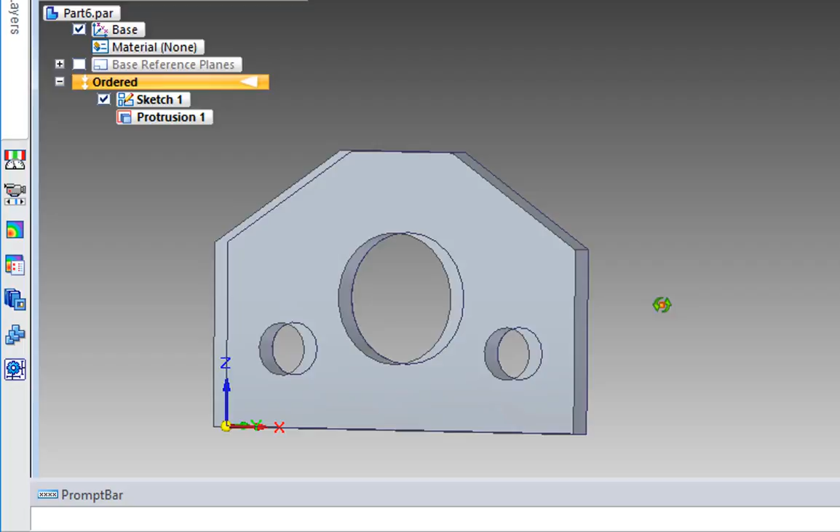Okay, so you finished problem 3. You made a nice plate. Now let's compare problem 3 and problem 4. I'll just kind of squish it over here and side by side them up on the screen.

There we go. And if we look at problem 4, we can clearly see it looks a lot like the problems we've solved so far. It looks like the plates we've been doing. It has a nice profile, and it has a hole in it.

A couple of new things. It has an angle here and an angle here. I'll show you how to measure angles with the Smart Dimension tool in this video. But the new thing going on here is this area in the middle where there's nothing.

It's a cut, as we'd call it. Some material has been cut and removed away. Because if we drew the front profile and extruded it all the way through this way, it would be a nice solid. But now we have a cut in there.

So what we're going to do is proceed as normal. We're going to draw the profile and this hole, and extrude the whole thing 1.5 — I think that's the depth of the part, along this edge. And all of these thicknesses, these walls around, are 0.25 thick. That's what these notes in the right-hand corner are telling us. So let's go ahead and get started and see what happens.

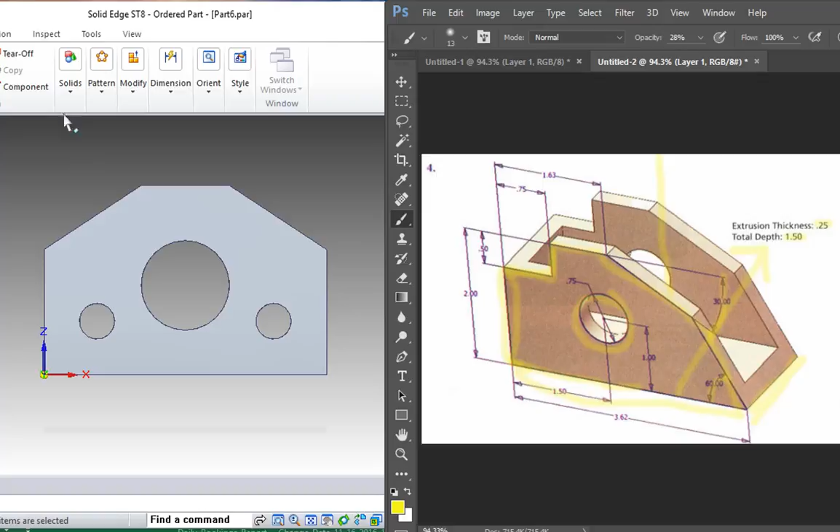To get started, we'll click on the Solid Edge logo. We'll click on New, then Inch Part, and click OK. Here we are, we have a new model started. We'll go up to the ribbon, click on Tools, then click on Ordered Drawing Mode. And there we go, we're ready to draw.

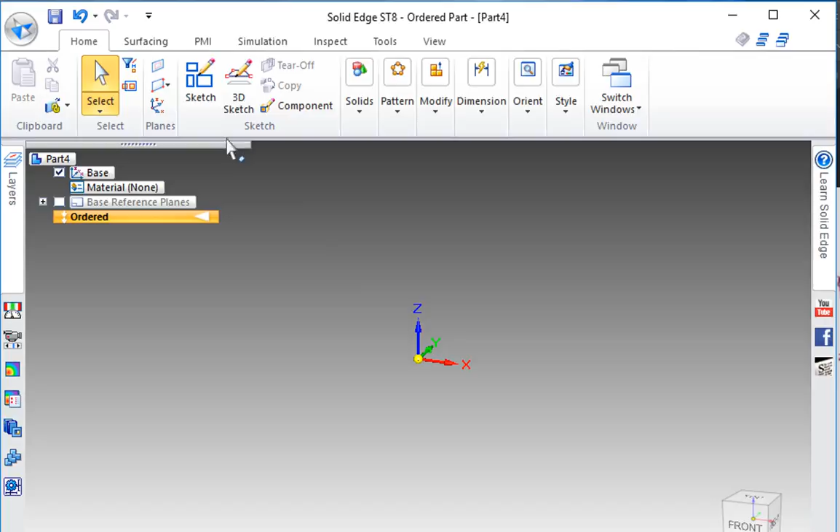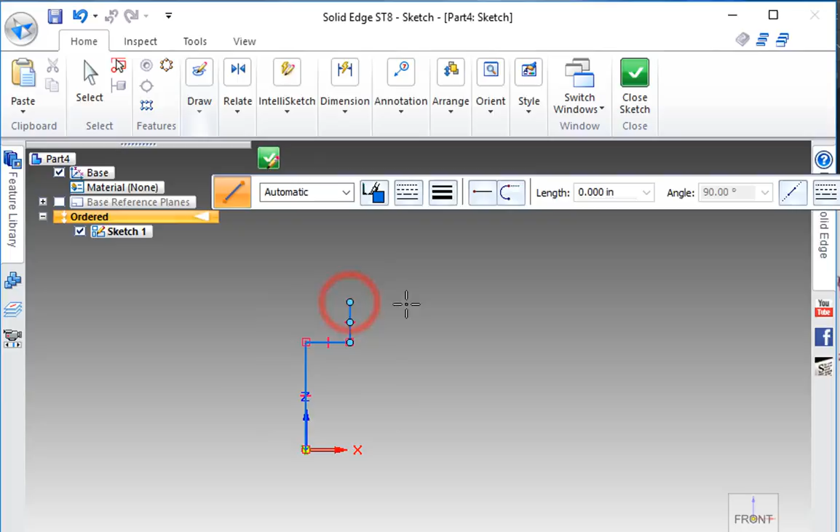I'm going to click Sketch, pick the front plane, and start drawing a different way this time. I'm just going to freehand the part with the line command. I'll click here, draw up — that looks like about 1.5 inches — over, up, over, down a lot. Maybe I'll line that up with that, and then pull that over there.

Now what I'm going to do after the fact is go dimension it. None of the dimensions are going to be accurate, so I'm going to try making this 3.62 and see what happens. That looks pretty good.

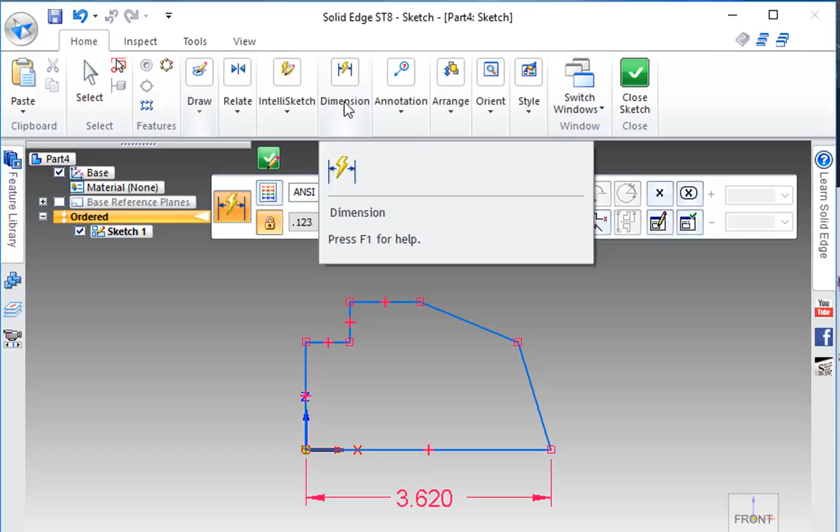I'm going to do an angle now. I'm going to pick this angle in the corner here, which is 60 degrees. I'll do Dimension, Smart Dimension, and click on this line and this line. Oops, let's try that again. Dimension, Smart Dimension, click on this line and this line.

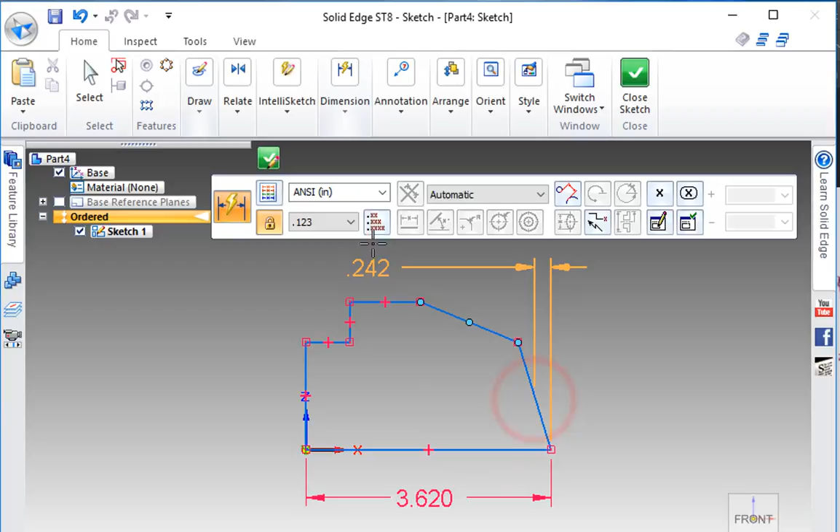Try that again. Dimension, click on this line and this line. And then I want to click on the angle dimension. I don't know why it was generating that error — that's kind of a strange thing. So make that 60.

I'll put this angle in on the top up here. There's also one specifically for angle between, so I can click on this line and that'll do just the angle. This is going to be, I think, 30 degrees from the print.

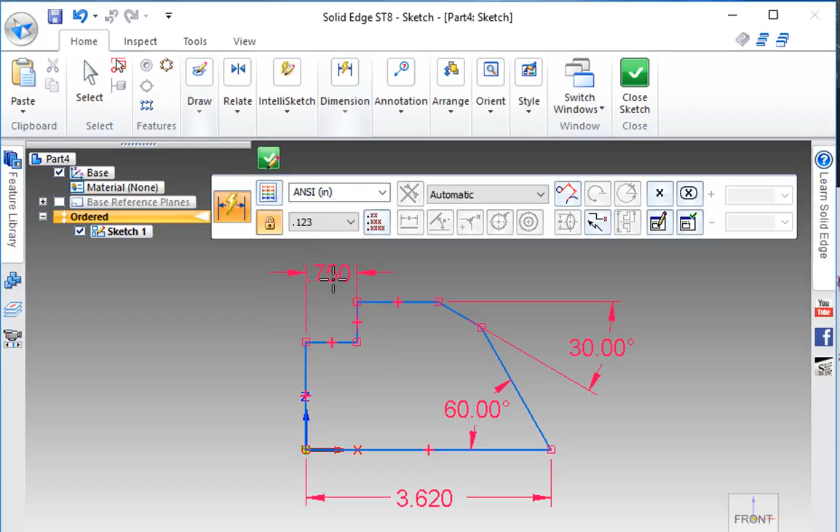Now I've got to put in the rest of the dimensions here. So dimension, this is going to be 0.75. Dimension top to bottom, it's going to be 2. And then dimension from this point to this point is going to be 1.63. So that looks like our part.

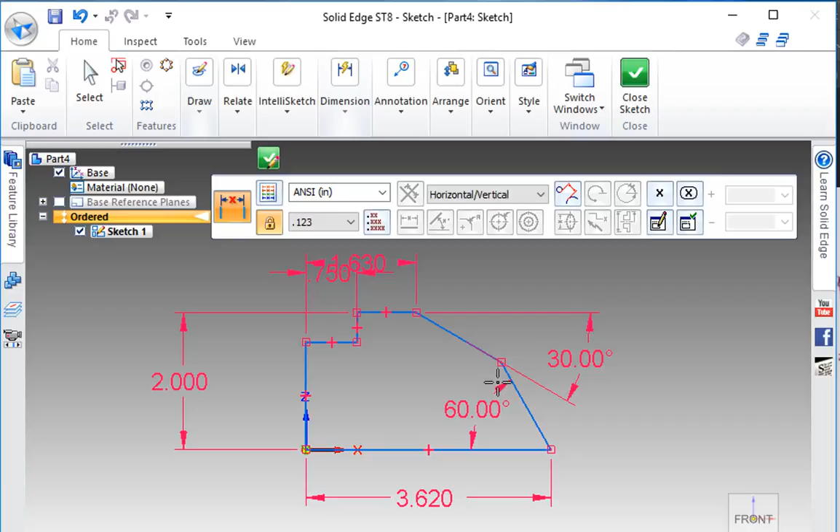And the thing of it is, I didn't put any dimensions in at the beginning. I just freehanded it, made it about the length of that, and put the dimensions in afterwards. So you can draw that way too. The reason I show you that is because you might want to invent something one day, and just want to get the shape out there without fussing over the dimensions right away.

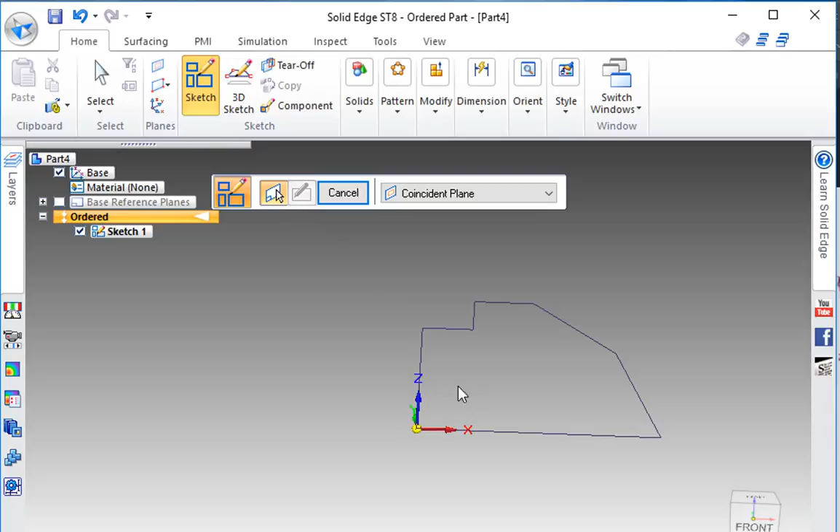So I accidentally closed the sketch, and I'm going to open it back up. I'll click Cancel, click on the sketch, click Edit Profile, and that will open up the sketch again. And I need to put the hole in there.

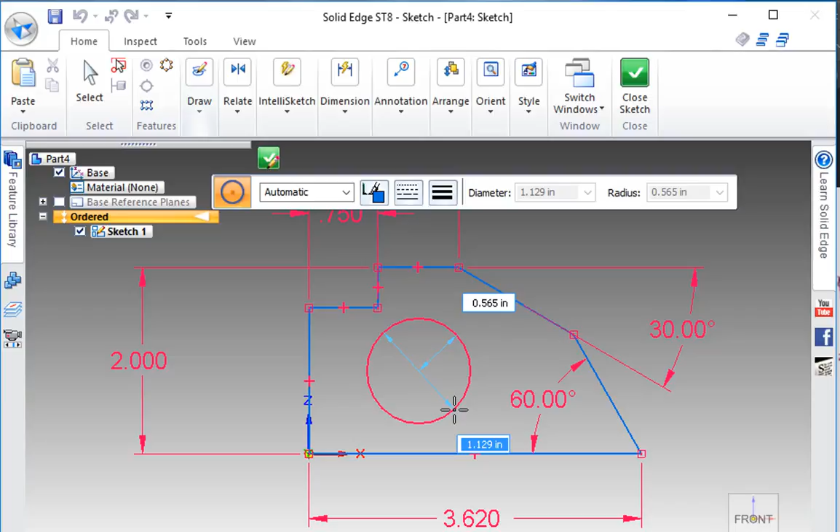So let's put the hole in. The hole is going to be a diameter of 0.75. Then I have to locate that hole — that's going to be from here to here. That dimension from the bottom is going to be 1, and then 1.5 from the left.

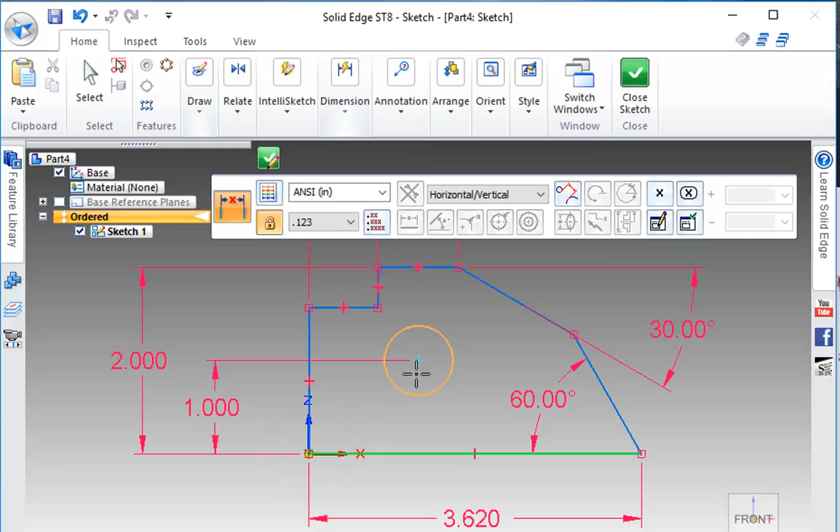So there is our part. Looks pretty good. Now let's go ahead and extrude it. I'm closing the sketch, clicking finish. I'm going to hit Control I for isometric view, and I'm going to hit solid extrude.

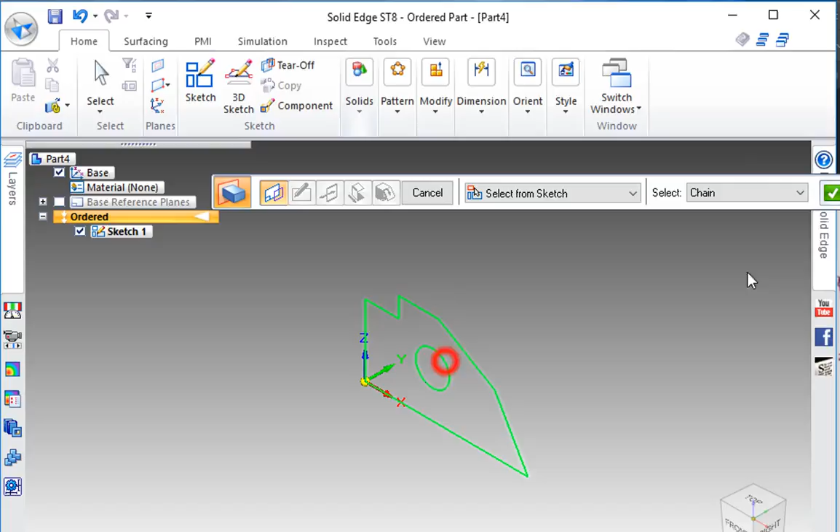And I'm going to pick the profile and extrude it out. So there you go. It's going to go 1.5, that'll be our distance, and I'll click. So there's our part right there.

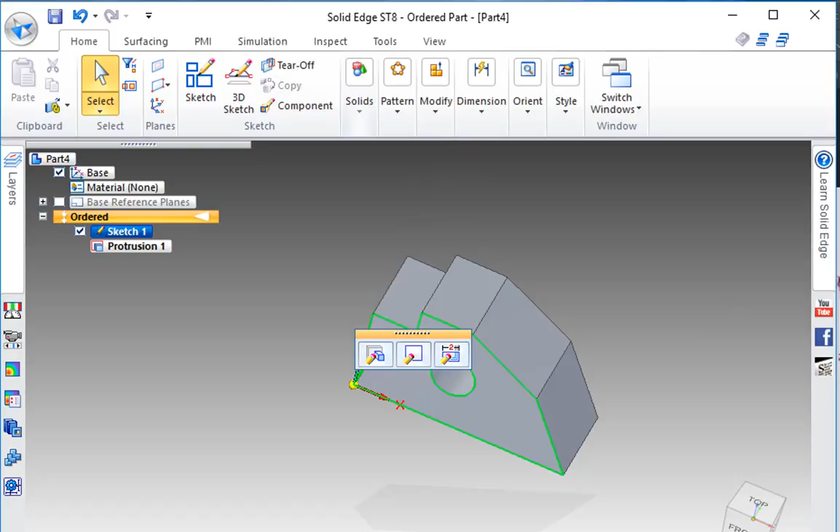But now I need to make the cut in the middle. So here's what I'm going to do next. I'm going to make a new sketch, and I'm going to put the sketch on the very top of the part. Watch, I'm going to hit sketch, and click this flat area right here.

So now I have a sketch plane. Let me go to isometric view here, and you can see it. I have a sketch plane on the top, very top of the part. See that? So I'm going to go back to the top view.

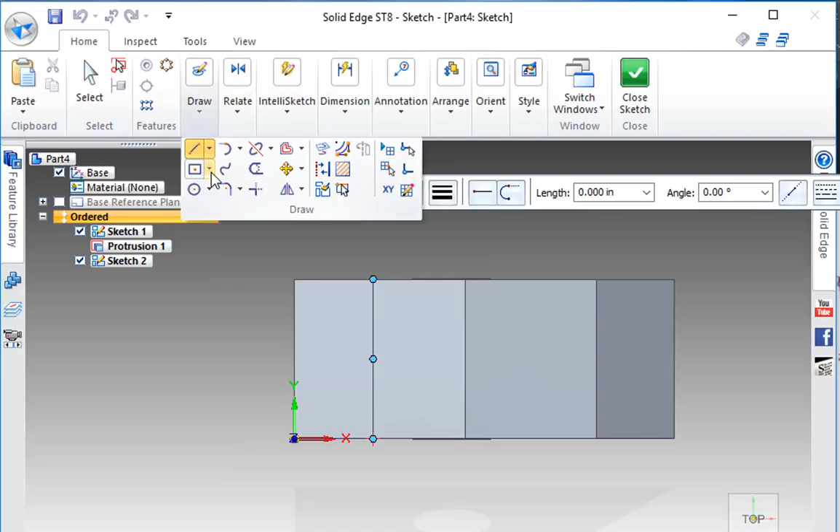And what I'm going to do is draw a rectangle. I want to do rectangle by 2 points. You'll notice if I click on the arrow, it gives me the option to pick rectangle by 2 points. And I'm going to click here,

here, there we go. Now I'm going to go dimension, smart dimension. I'm going to go between here and here. And we know the thickness all the way around is 0.25, so I'm just going to dimension this rectangle 0.25 from the edge all the way around.

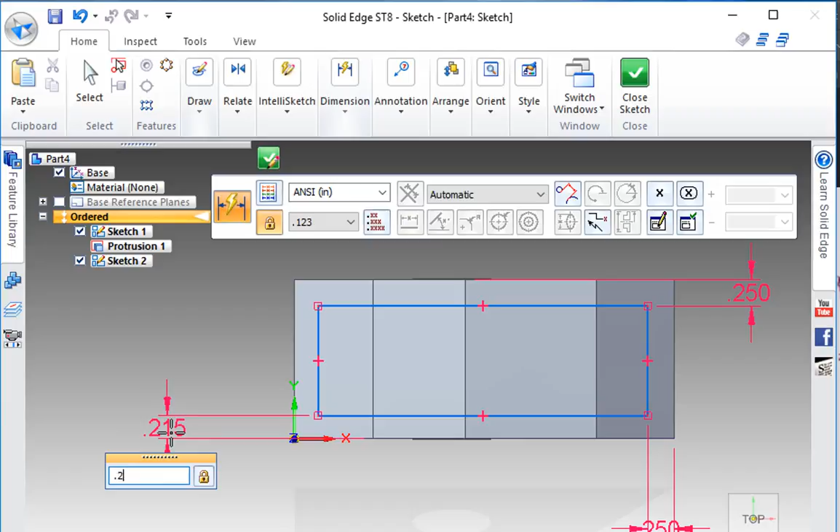And this is one of the nice things about Solid Edge: you don't have to project the underlying geometry. You can dimension right to the lines even though they're not part of the sketch. In other CAD packages, you have to project the geometry if you want to do something like this. But I don't know, I kind of like this. This is nice. So there we go.

0.25. So let's look at it in isometric view here just so you can see what it is. You can see that we have a rectangle in space on a plane right above the part. Now I'm going to hit close the sketch.

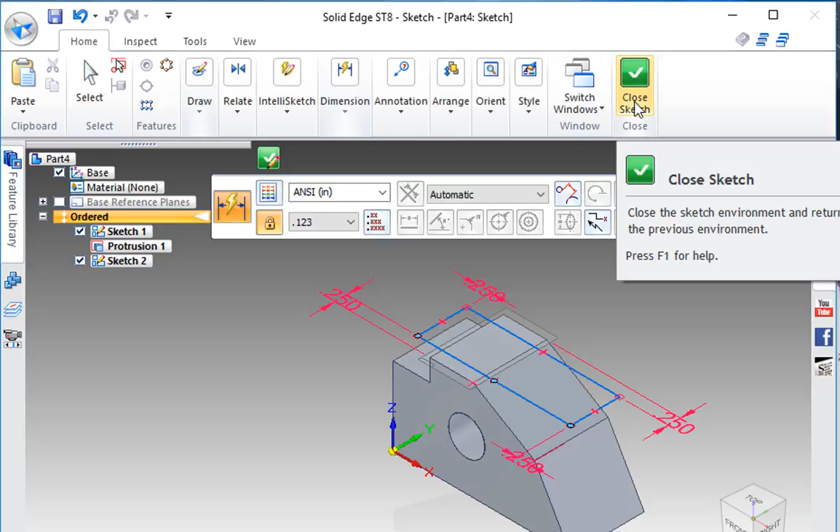So you can see my rectangle up there ready to go. And then what I'm going to do is cut this rectangle into the part. So I'm going to do solids, and next to extrude is a cut. What would you like to cut?

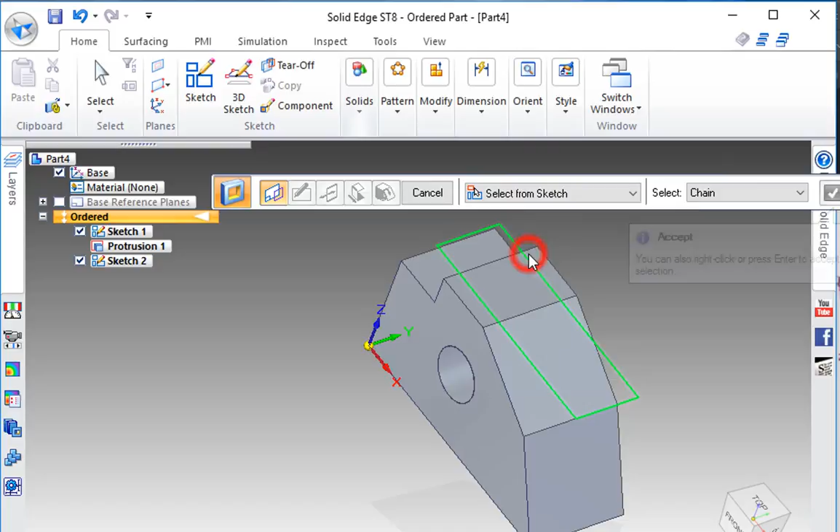I don't want to cut a coincident plane. I want to select from sketch. I want it to be this sketch right here. Click the green checkbox, and I'm going to pull it down. Look at that. Look at that.

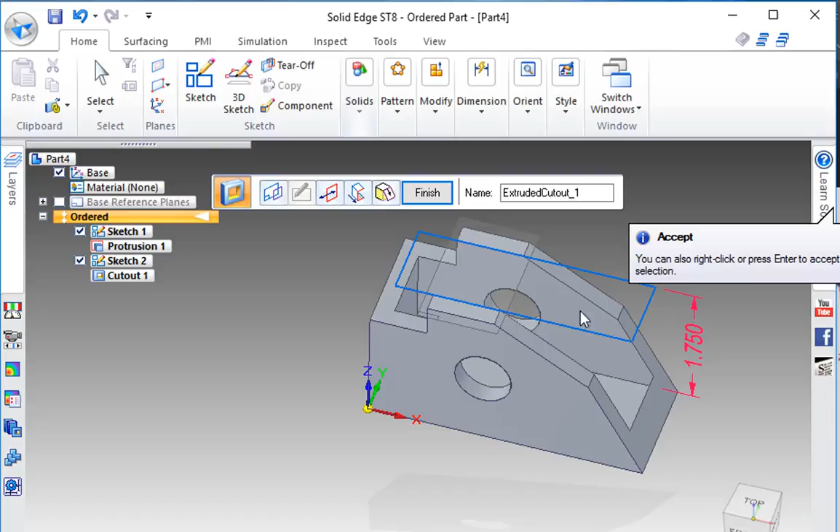So now the question is, how far do you pull it down? Anyway, I'll let you work that part out by looking at the print. There's a little math involved there. But overall, that's the concept of how to make that cut from the top there. So you make a new sketch, and you use that to cut down.

And also, anywhere you have a flat area, like I want to make another sketch on the front, no problem. I'm sketching on the front. I'm going to draw a circle. I could put a new circle there, close sketch, and then I could cut that circle through.

So if I were free designing something and I needed a hole for something, like maybe I'm working on a robot part, no problem. After the fact, I can always go through and cut more holes. And if you look at these little options here, I can click through all, and that will cut through - sorry, got to pick the arrow of the direction I want to go - that'll cut through all the material.

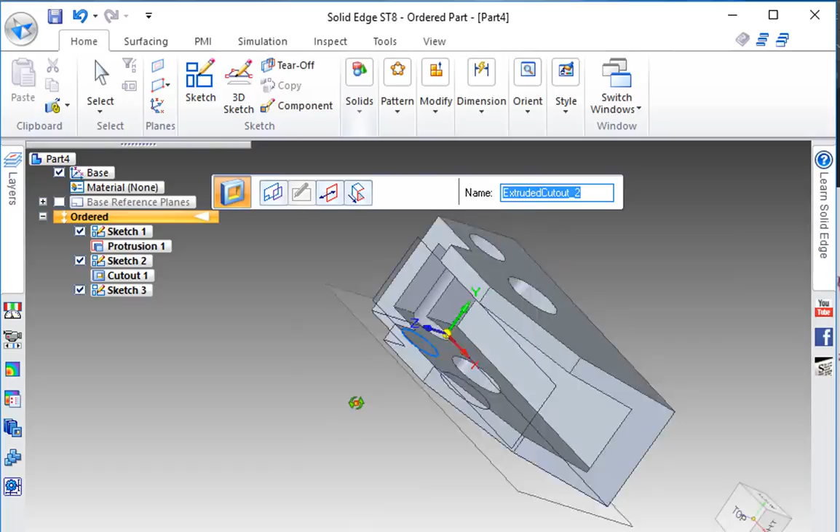So that is how you do problem number 4 with a bonus hole at the end. I'll hit Control Z and get rid of that so you don't see it.